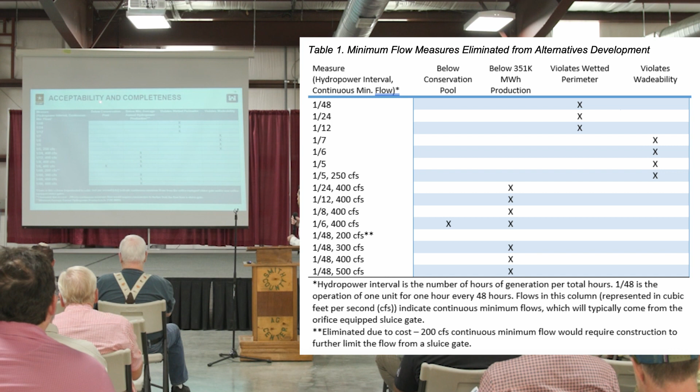And so looking at the measures you see here, these are a list of the different measures. And you can see like 1 pulse every 48 hours, 1 pulse every 12 hours. This is what this is recognizing here. This is 1 pulse every 5 hours with a 250 CFS continuous minimum flow. And so looking at all these minimum flow scenarios, we use different criteria to basically weed some of these out. The first one here is below conservation pool.

So what this said was if that measure dropped the reservoir below the conservation pool, which is a range between 618 and 648 feet, so it's a 30-foot range that we have, if it dropped that into the inactive pool, then it was eliminated from consideration. That's critical because once you get below 618, you're looking at water supply intakes, different things like that. You're losing all your net head for hydropower generation. You're losing a lot of your recreation opportunities. Those types of things are really impacted when water levels get that low.

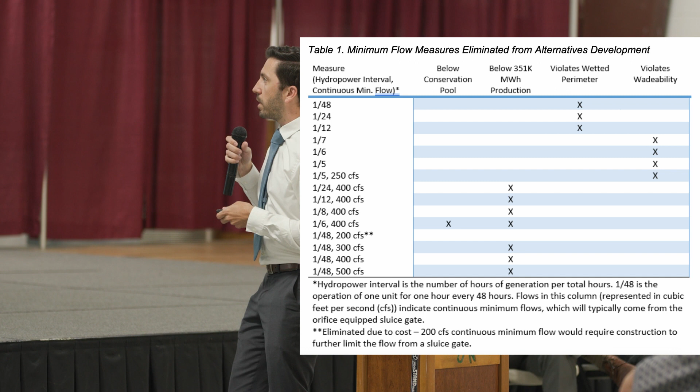The next category there is below a minimum average annual hydropower generation. Patrick mentioned that. That's that 351,000 megawatt hours. So thinking about that, that's what was described to us when we designed this project and it was built and authorized. It was intended to produce a certain amount of electricity at a minimum, average annual minimum. And so a lot of alternatives had that trigger hit, and those alternatives were eliminated for not meeting that criteria as well.

Next one, violates wetted perimeter. So we looked at different studies, we looked at our own analysis, we looked back at historical records. What were conditions like before the dam was built? What were conditions like since the dam was built in terms of if we had that natural inflow and there was no dam there, what would we expect the river to look like naturally?

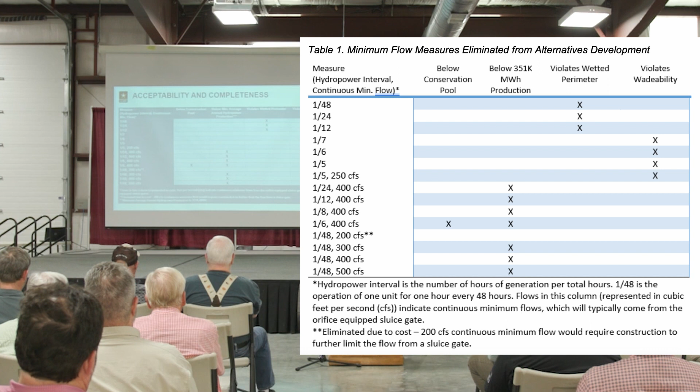And so thinking about it from that perspective, we were looking at, okay, which of these is basically not putting enough water downstream that we think we're having a condition that would have been worse than it would have been naturally. And so those measures were eliminated for those reasons.

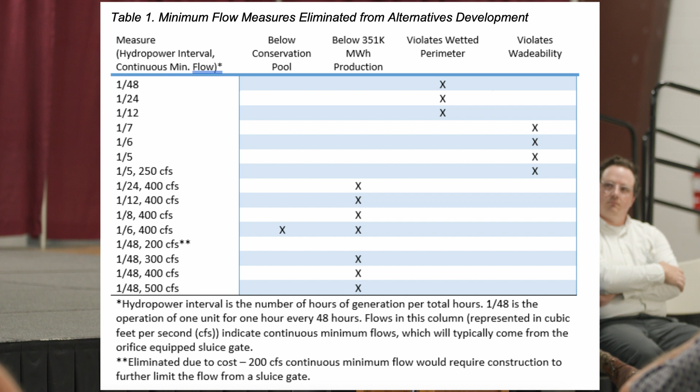And then wadeability, again, a little more self-explanatory here, but this was, does the measure provide the opportunity for safe wading conditions for a reasonable amount of time? And so we were looking at our downstream modeling to show, okay, if we pulsed here, how long until that pulse went down so people could get back in the water until the next pulse happened?

If there wasn't enough time to basically safely recreate and wade in that area and have that recreation that we all know and love at Center Hill, then those measures were eliminated as well. So that's kind of how we went through that. That boiled us down to about 8 potential alternatives. You'll see 9 on here.

The first one on here, this is the no action alternative. So it would have been eliminated by some of those criteria, but the no action from a NEPA perspective has to be carried through. This is what we're comparing all of our new alternatives to. No action is basically current condition, what's currently in the water control manual. So that's 1 hydropower unit every 48 hours.

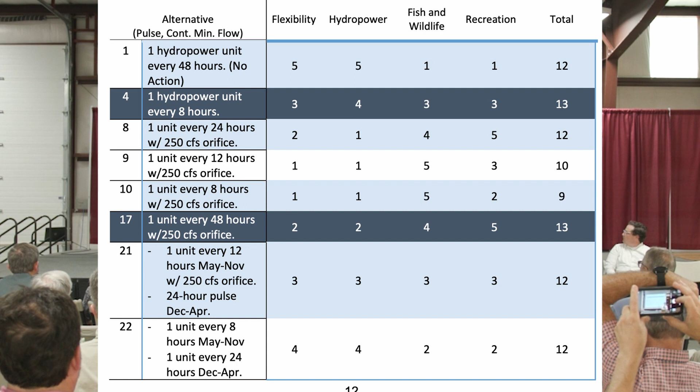So then, when we're looking at those second 2 criteria that I mentioned earlier, that's effectiveness and efficiency. How well are these different alternatives doing the job that we're trying to get them to do, right? So if you're looking at effectiveness and efficiency, there's a lot of numbers on here. I don't expect you guys to be able to read all this. A lot of this information is categorized very well in the environmental assessment. So if you have time, if you have not already done so, please read some of that documentation. It should help explain any questions you have.

This is a 1 to 5 rating in terms of how well we thought each one of these alternatives met these different criteria, 5 being the best, 1 being the worst. We put some ratings to these to kind of help us narrow down the alternatives into something that we could work with. The ones that we'll focus on here are the ones that are, we'll just say, pale, white: 1, 4, 17, and 23. So again, 1 I mentioned, that's the no action. That's going to be carried forth no matter what.

4 is 1 hydropower unit every 8 hours. 17 is 1 unit every 48 hours with a 250 CFS continuous flow, most likely through the orifice gate. And then 23 is a seasonal alternative that basically has 17 through the June through November period, and then alternative 4 in the December to May period. So it's a combination of 17 and 4.

All right, so basically after that was done, we took those 4 alternatives that were left, those light colored rows, and we broke them down even further and tried to do some additional engineering analysis to determine how can we compare these, how best to kind of rack and stack them amongst each other. And so one of the things that we were looking at is environmental analysis recreation. How well are we going to be able to improve the downstream area below Center Hill Dam, right?

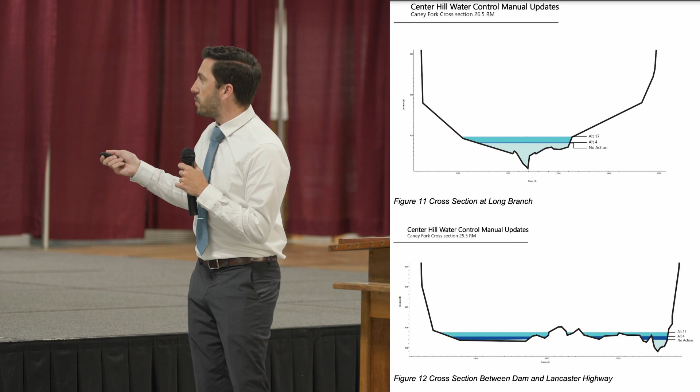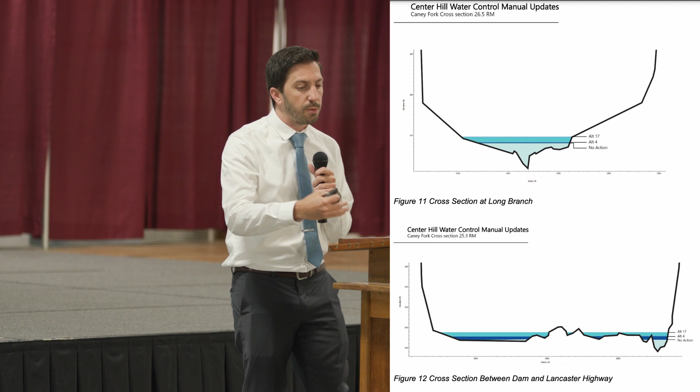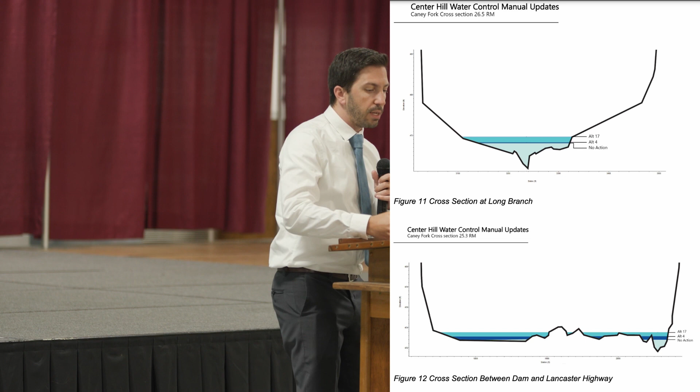Once we go to alternative 4, we kind of see a little bump up from that 1 pulse every 8 hours. Again, this is because in the immediate vicinity of the dam, we're going to have the quickest drop off from that pulse, right? As we put it on, elevation is going to go up. As we push it down, it's going to go down. Alternative 17, that's where you see the biggest discrepancy here. Right in the immediate vicinity of the dam, we have the biggest difference between a pulse and a 250 continuous minimum flow. However, as you start moving down, and this is not very far downstream, it's about a mile downstream, between Long Branch and Lancaster, so we're looking around this area here, this is how the cross-section looks there.

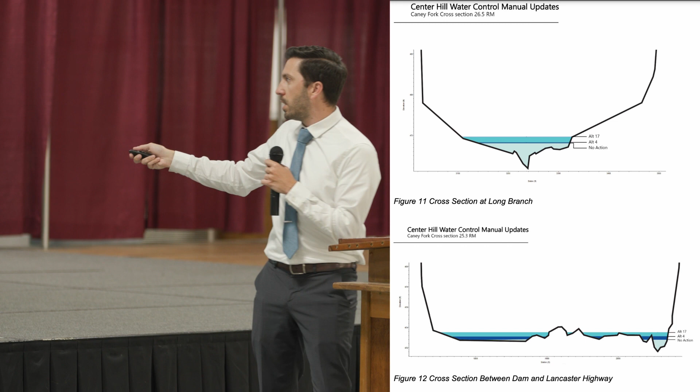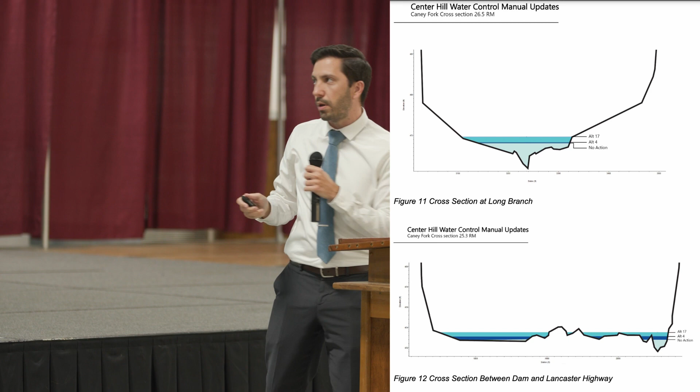And so you can see here, alternative 4, in terms of the depth of water, is getting thicker. So we're seeing more water in those cross-sections from this pulse, just even a mile downstream. Now you can see also, there's still that bar on top, but that's starting to shrink now. The delta between them is starting to shrink. And so again, you could tell better on the pictures in the back of the room, and we can talk through that after the presentation. But that's important to note. As we continue to move further downstream, you're going to see the same thing continue to happen. So Lancaster, a little bit further down, and then Happy Hollow, a little bit further beyond that.

I see your guys' hands. I'm not trying to ignore you. But we just use the word pulse a lot. Can you just define pulse? Sure, absolutely. So a hydropower pulse, when I say hydropower pulse, it's basically turning the unit on for 1 hour and then turning it off at the end of that hour. So a pulse release is something that is going to be on and off, kind of similar to how we're doing things now. You're going to see a big slug of water happen for an hour coming out of the dam, and then that water is going to stop immediately after we stop discharging.

Hydropower turbine is all kind of under the water, so you don't see that cascade that you would see from the Tainter gates coming from the top of the dam, or the violent sluice action that you see when it comes off the flip bucket. But also all this water is kind of being pushed into the tail race underneath the surface of the water. But that's what that pulse means. I'm sorry, thank you for asking.

At what point in the pulse are you measuring these? So this is the peak. This is the peak, yes. Good question as well. All right. So this is the highest that we would see or the lowest that we would see from those different alternatives.